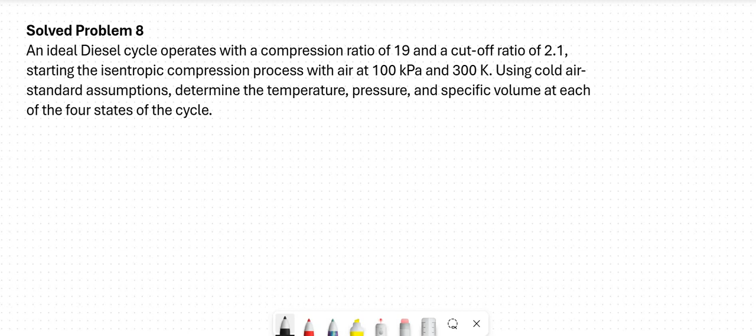So let's continue our topic on diesel cycle. So let us solve this problem. Kung may mga formulas na biglang lumitaw dito na hindi ninyo alam kung paano na-derive, balikan nyo na lang or panoorin nyo na lang yung mga videos before this problem, no? Okay?

So, an ideal diesel cycle operates with a compression ratio of 19 and a cut-off ratio of 2.1. Starting the isentropic compression process with air at 100 kilopascal and 300 Kelvin. Using cold air standard assumptions, determine the temperature, pressure, and specific volume at each of the 4 states of the cycle.

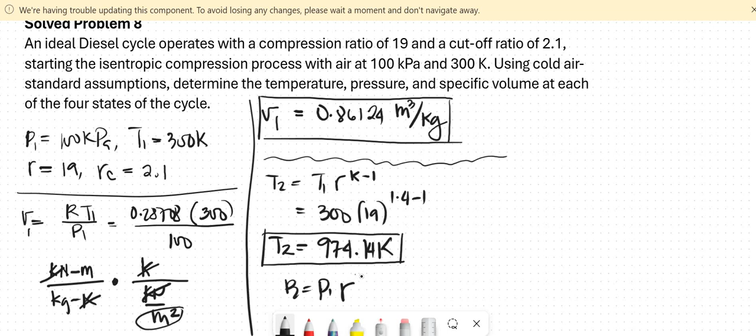How about yung P2 natin? We have P2 is equal to P1 and then r raised to k. So, we have P2 is equal to 100 and then 19 raised to 1.4. So, P2 is 6169.6 kilopascal.

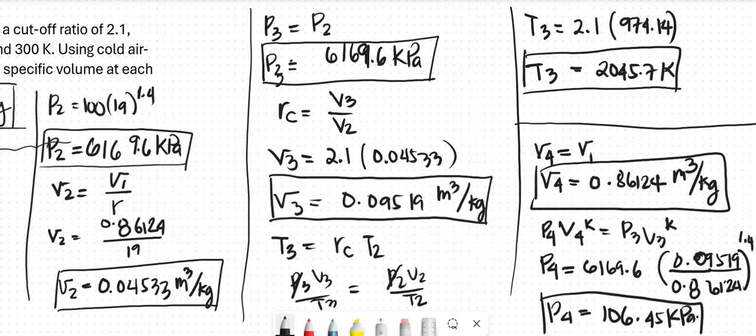kilopascal, no? Okay, or pwede rin naman gamitin yung combined gas law. We have P4 V4 over T4 equals P1 V1 over T1. So, constant volume yan. Pwede rin yan, no? Since given naman na yung P1 tsaka yung T1, makukuha ang T4. How about yung P4? Hindi pala pwede, no? Kailangan mo nang makuha yung T4 bago makuha ang P4.

Anyway, makukuha naman natin ang T4 gamit ang T4 is equal to T3 and then rc over r raised to k less 1. Okay? Sir, paano naging ganyan yung formula natin for T4? Na-derive ko na ito doon sa nauna nating sample problem. I think that is sample problem 7 of this YouTube channel, no?

So, this is 2045.7 and then we have 2.1 over 19 raised to 1.4 less 1. Okay. 281.81 Kelvin. So, yan. Kompleto na lahat ng pressures, temperatures, and specific volume.

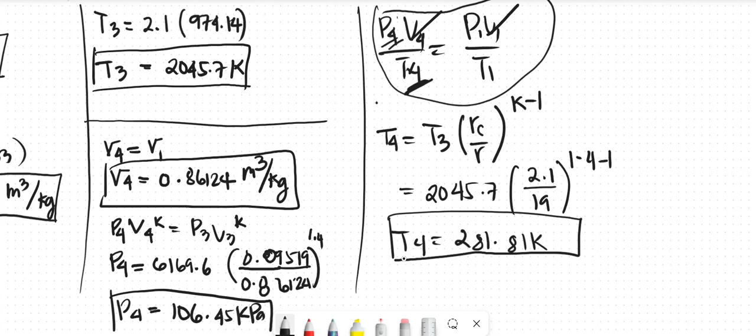Okay, so meron tayong follow-up question sa solved problem 8. In solved problem 8, calculate the specific work of compression and expansion in kilojoules per kilogram as well as the heat added during the constant pressure process and the heat rejected during the constant volume process.

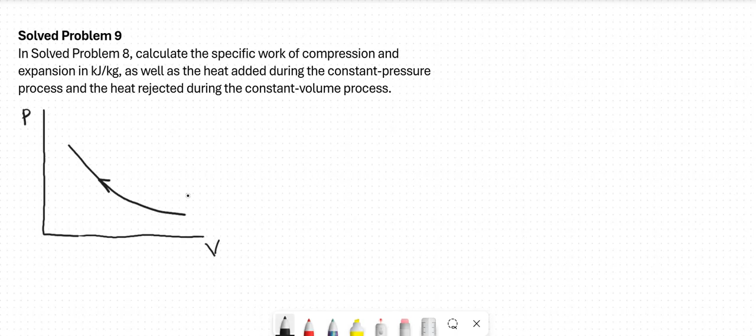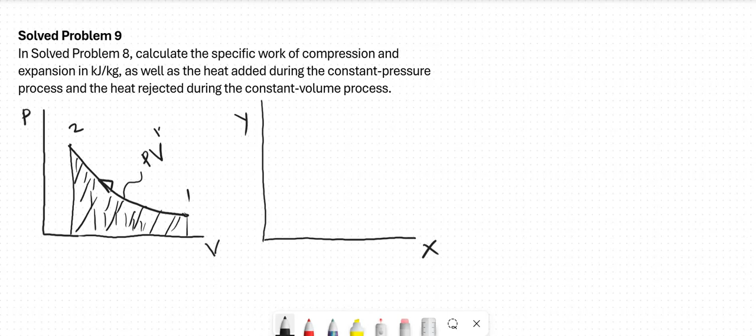So yung work dyan ay equal doon sa area under the curve. Ito yon, yung area na ito. Ang problema, sir, paano natin masosolve yung area? Kung babalikan ninyo yung inyong integral calculus, parang ganun yung pagkuha. Ngayon, palitan ko yung PV diagram ng XY plane. Yung equation ng path na ito, since yan ay constant entropy, we have PV raised to k is equal to C. Or generally, PV raised to n is equal to C. If S is equal to C, constant entropy, yung n mo is equal to k.

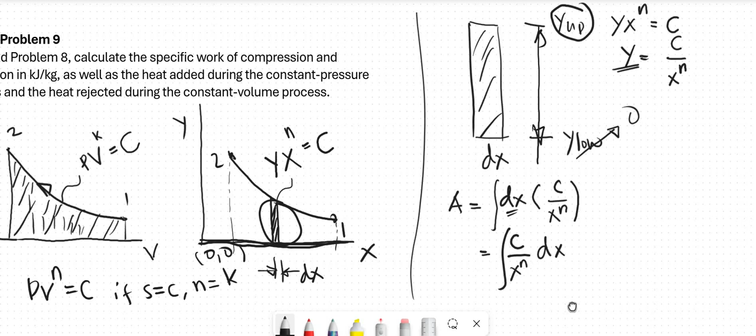So, area is equal to base times height, dx, and then the y up minus y low, which is c over x raised to n. Ayan. So ngayon, since meron kang dx dyan, dapat ito integral. Then, i-arrange natin c over x raised to n and then dx. Okay? Now, since yung c natin ay constant, ilabas natin. So, area is equal to c integral ng dx over x raised to n from state 1 to 2.

Ngayon, since yung equation natin ay ano na ulit yun? Yx raised to n is equal to c. Ibig sabihin, y1 x1 raised to n ay equal sa y2 x2 raised to n. Ayan yun. So, ibig sabihin, pwede nating palitan si c ng ito. Pwede ito ang ilagay natin dyan, o kaya naman ay ito, kasi parehas lang naman na equal sa c.

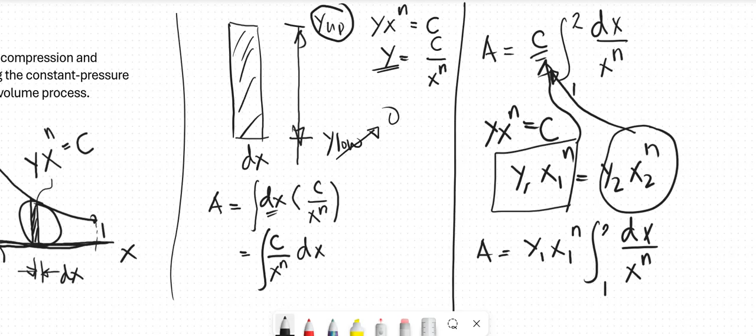So, area is equal to y1 x1 raised to n, and then integral ng dx over x raised to n from 1 to 2. Okay? Now, balikan natin, sabi ko kanina na ang area under the curve ay nire-represent ang work non-flow. So, palitan natin yung area ng work non-flow, and then yung y is pressure, so P1, and then yung x is V. So, V1 raised to n, and then we have integral ng dV over V raised to n from 1 to 2.

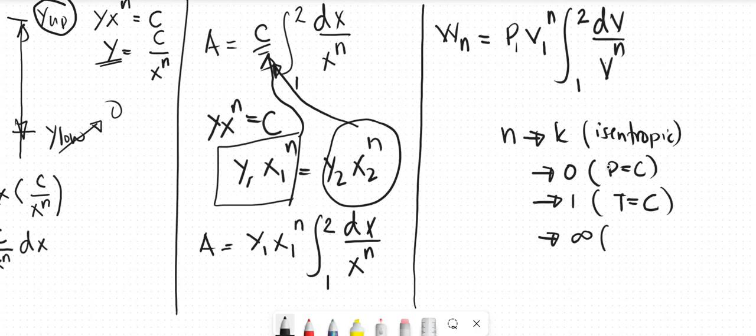Ngayon, yung n, palitan natin yan ng k if isentropic. Palitan natin yan ng 0 kung P is equal to c. Palitan natin yan ng 1 if T is equal to c. And then, palitan natin yan ng infinite if V is equal to c. Or, kung given yung n, yun ang ilagay natin dyan.

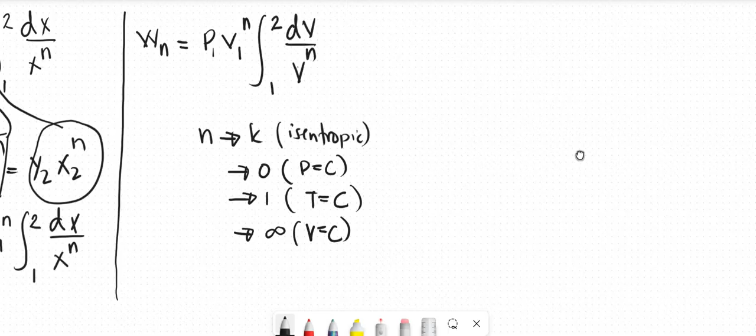Okay, now, balik tayo doon sa volume during compression. So, during compression, we have work non-flow is equal to P1 V1 raised to k, kasi isentropic naman yung process natin, times integral of dV over V raised to k from 1 to 2. Ano ba ang P1 natin? 100 kilopascal yung given. And yung V1 natin, na-compute natin kanina, ay 0.86.

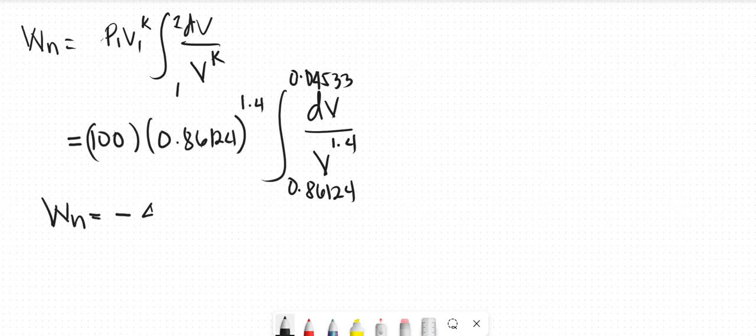0.86124 meter cube per kilogram, kaya ang magiging sagot natin dito sa work ay kilojoule per kilogram. And then 1.4, and integral ng dV over V raised to 1.4 from 0.86124 to yung V2 natin na nasolve kanina, 0.04533. Type lang natin yan sa calculator, lalabas ay negative 483.8 kilojoules per kilogram. So, yan yung work compression.

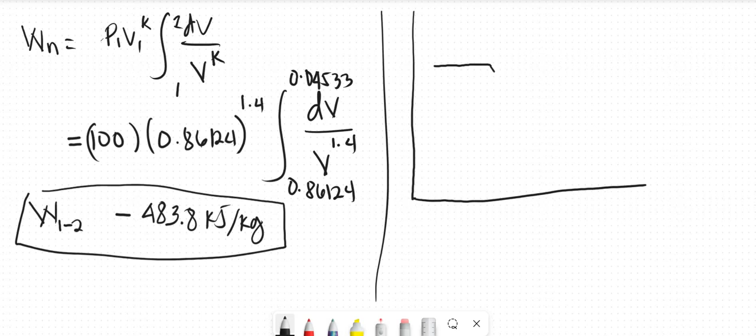Lagay ko na lang dito, process 1 to 2. Palitan ko na lang ito ng work 1 to 2. Doon naman sa expansion, balikan natin yung ating PV diagram para sa diesel cycle. Okay, ganyan siya. Ito yung 2 natin, ito yung 3, and then ito yung 4, and ito si 1.

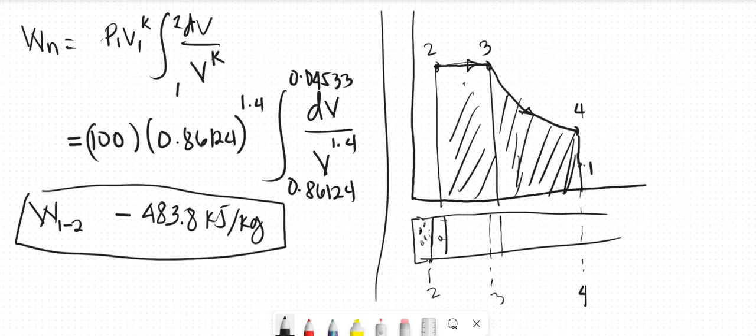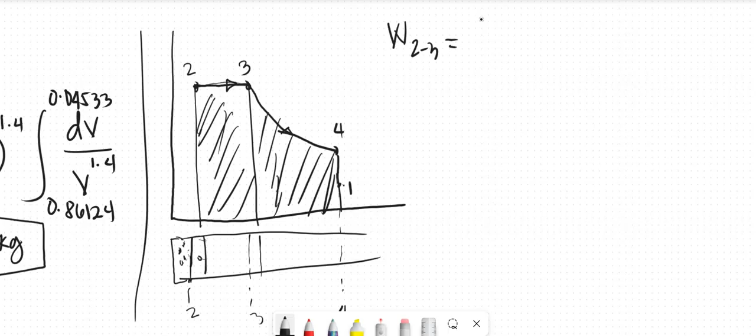Kaya, ibig sabihin, yung area dito tsaka dito ay kukunin natin. So, ihiwalay natin yan sa dalawa, area 2 tsaka area 3. So, work 2 to 3 is equal to P2 V2 raised to n, and then integral ng dV over V raised to n from 2 to 3. Okay? So, n is equal to 0, since yan ay P is equal to constant, or constant pressure. So, ito magiging 0.

Any number raised to 0 is equal to 1. So, magiging 0 na rin ito. Magiging P2, kasi 1 yun eh. And then, integral ng dV from 2 to 3. Okay, so yan.